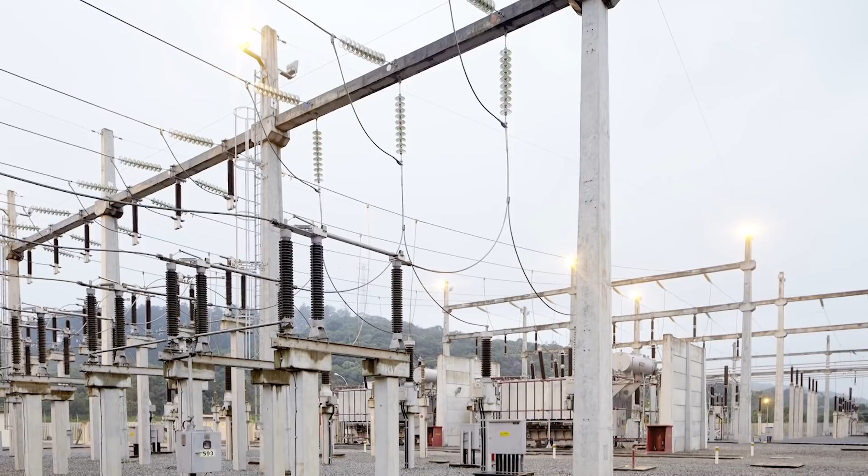A point to be mentioned is that Kandy is facilitated with infrastructure such as 93% electricity coverage as against 62% with pipe-borne water coverage.

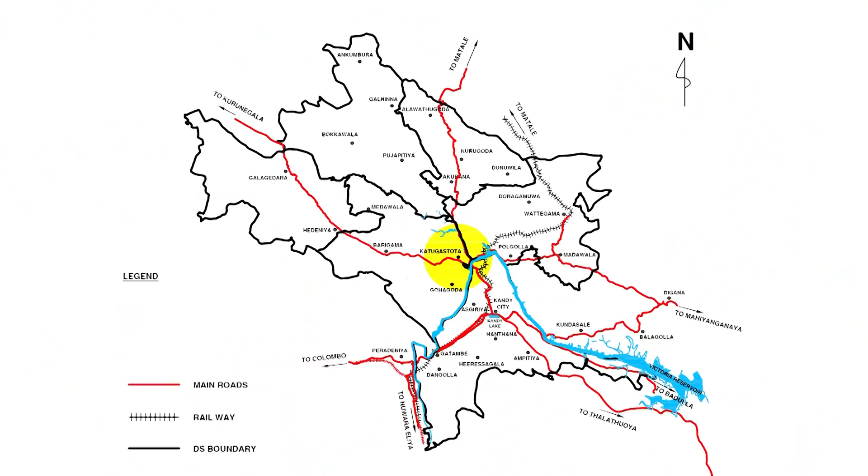Although the city of Kandy is surrounded by a wide range of mountains with the trace of the Mahaweli River, still pipe-borne water is a luxury to some parts of Kandy suburbs such as Pathadumbara, Akurana and Pujapitiya. Even valleys go dry during the dry season.

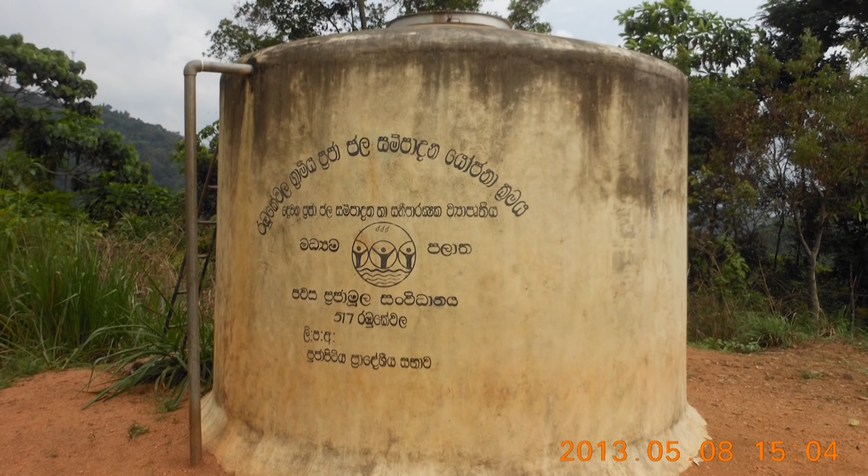The water service facilities before the year 2000 were limited mainly to the Kandy city, Harispattuwa and Pathadumbara areas, where borehole systems were constructed during the early 80s. The service level was very poor even in the Kandy municipal area. The small water systems, which were fed from deep groundwater sources, had quality problems as well as poor yield.

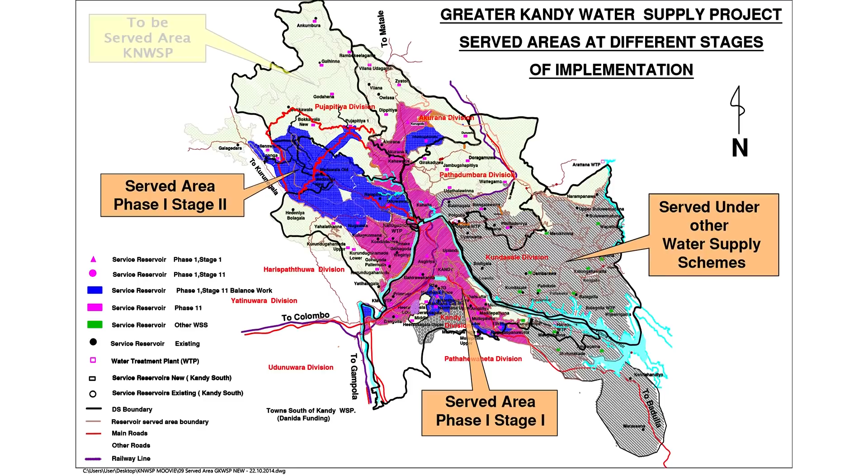JICA prepared a master plan with the National Water Supply and Drainage Board in 1998 to give a solution to the water problem in and around the Kandy area. This project was planned in 3 phases.

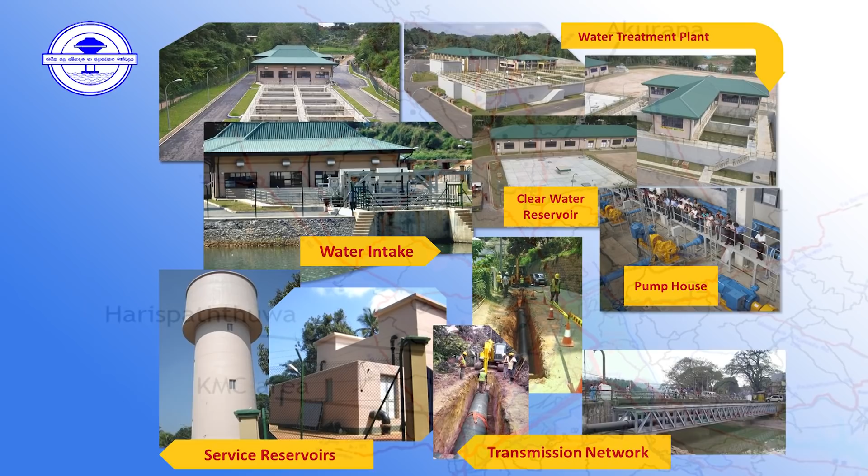Phase 1, Stage 1 of the Greater Kandy Water Supply Project started in 2001 and was completed in 2006, at a cost of 5,543 million rupees through funding of JICA.

Under Phase 1, Stage 1, a water intake was constructed from Polgolla pool at Gohagoda area. Also, a treatment plant was constructed in Katugastota with provisions for future expansions.

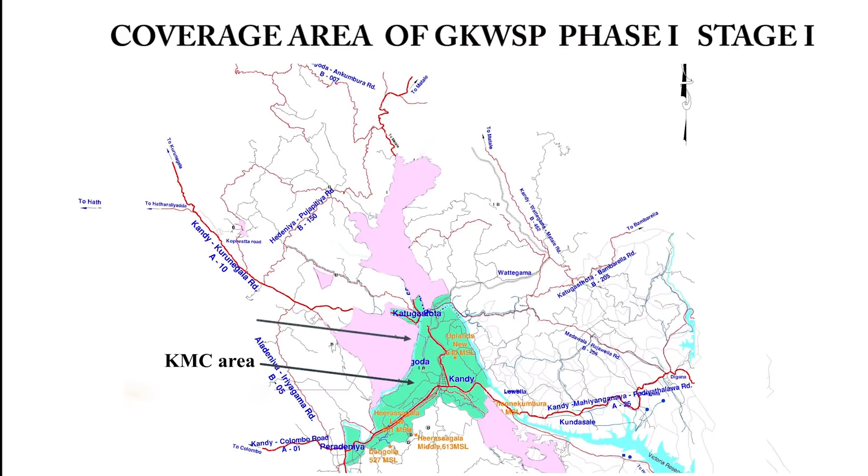With the implementation of the Greater Kandy Water Supply Project Phase 1 Stage 1, the water supply facility was improved in the Kandy municipal area, Harispattuwa, southern part of Pujapitiya, Akurana, and a part of Galagedara as well.

Under Phase 1 Stage 1, 4 reservoirs were constructed, including Asgiriya Reservoir, which was meant for the Kandy municipality. The existing service level in the Kandy Municipal Council area was also improved remarkably.

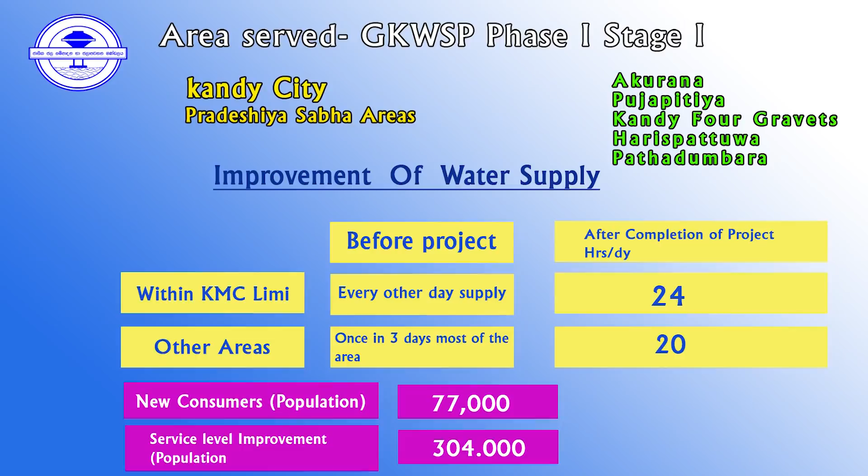Also, Kurugoda, Kahavatta and Kahalla service reservoirs and a pump station were built in Kahavatta to supply water to Kurugoda. New consumer population benefited by Stage 1 of the project was 77,000. Existing water supply facilities also improved for 304,000 of the population, including the Kandy Municipal Council area.

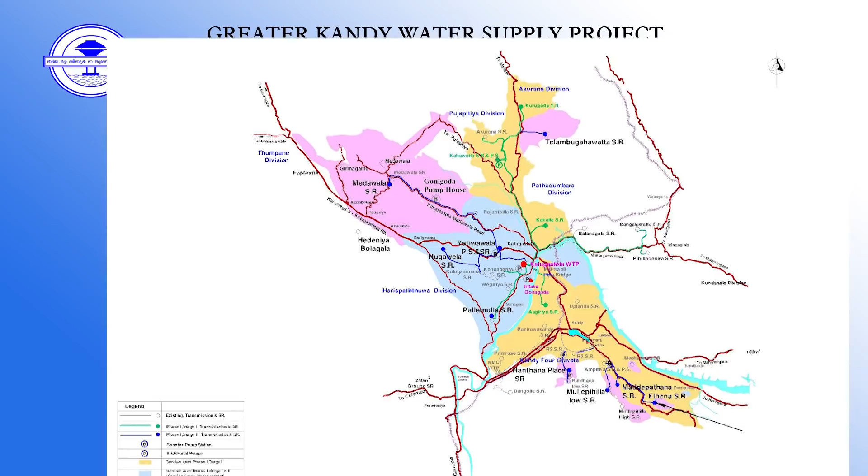JBIC, the Japan Bank for International Cooperation, agreed to provide further assistance to continue the water supply facility improvements in the Greater Kandy Water Supply Project area under Stage 2 of the project. Under the SLP 90 loan package, 3,447 million yen was allocated for the Greater Kandy Water Supply Project, Phase 1, Stage 2.

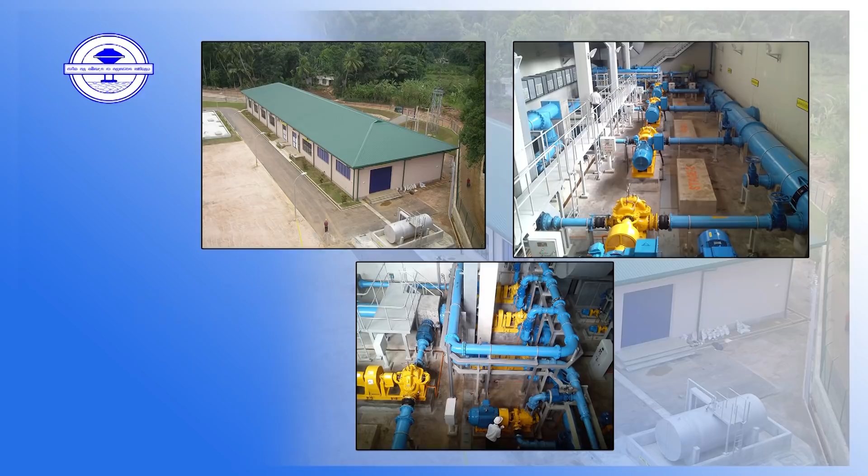The project scope consisted of 8 service reservoirs, namely Yathwawala, Nugawela, Guhaguda, Hantana Place, Mullepihilla, Elhena, Maddepathana and Telambugahawatta, plus 4 pump stations: R2, Hantana Place, Ampitiya, Yathwawala, and improvements to the main pump station at Katugastota water treatment plant.

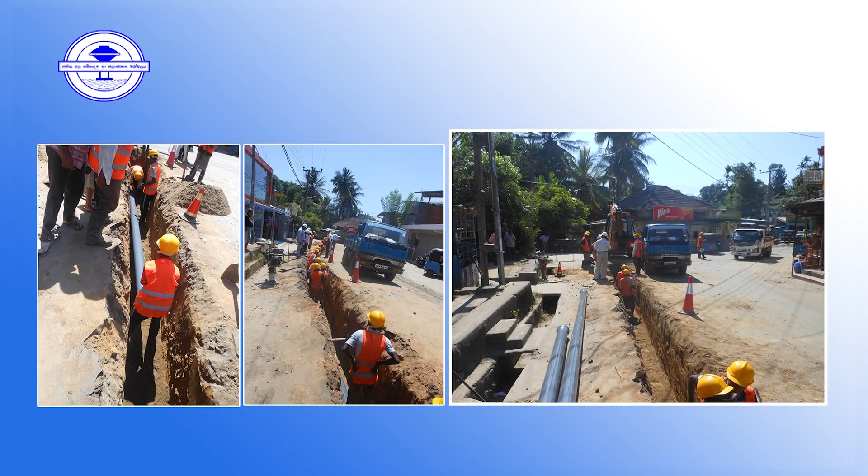In order to promote the local construction industry, all implementation work was done through Sri Lankan contractors.

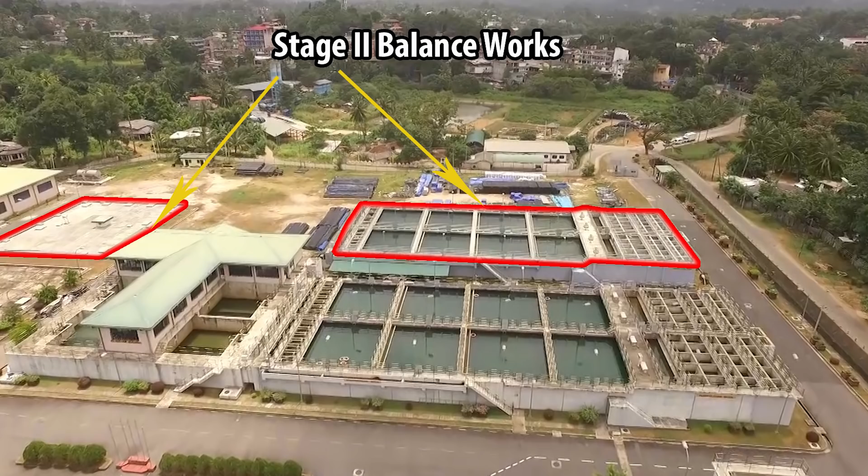Savings from the SLP 90 loan package of JBIC JICA were utilized to improve the water treatment plant, where a new flocculation unit, sedimentation tank and a ground reservoir unit were built, to enhance the water treatment plant capacity up to 48,000 cubic meters per day.

The Greater Kandy Water Supply Project was able to supply water to Medawala Reservoir in order to improve the service levels of consumers living in Rajapihilla, Medawala, Hedeniya, and Pujapitiya areas.

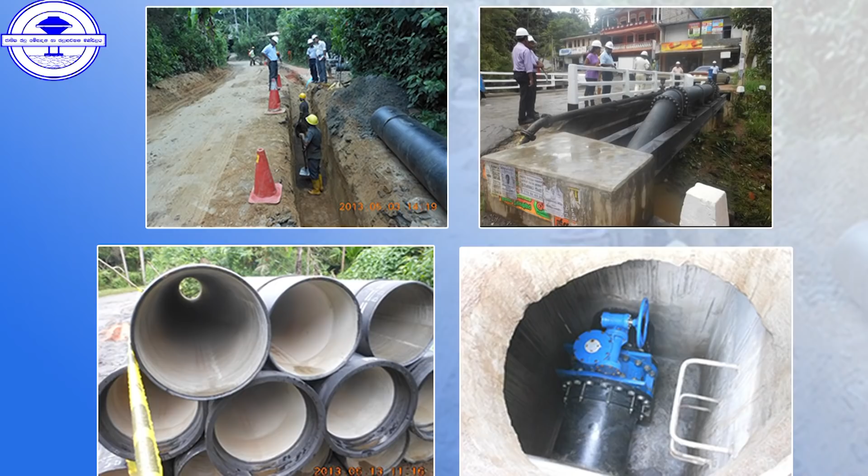A 4.5 kilometer long transmission main was laid and the Gonigoda pump station was constructed to feed the Medawala new reservoir and the Medawala existing reservoir as well.

Provisions were made to supply 5,000 cubic meters per day to the Galagedara and Mavatagama area.

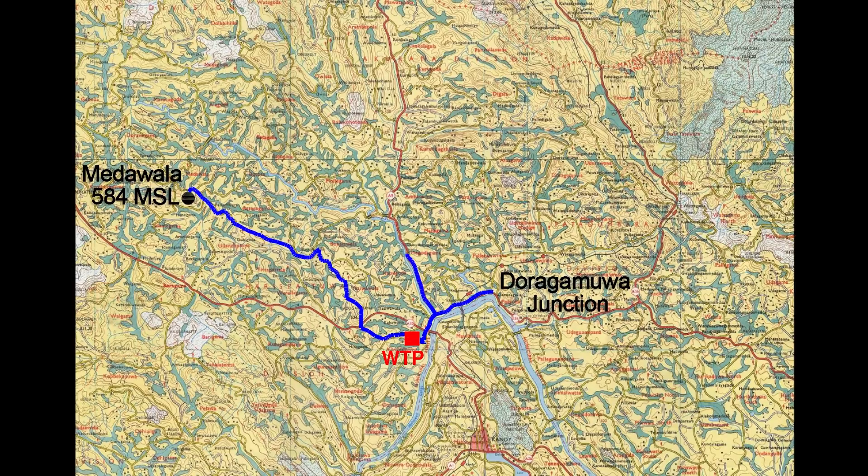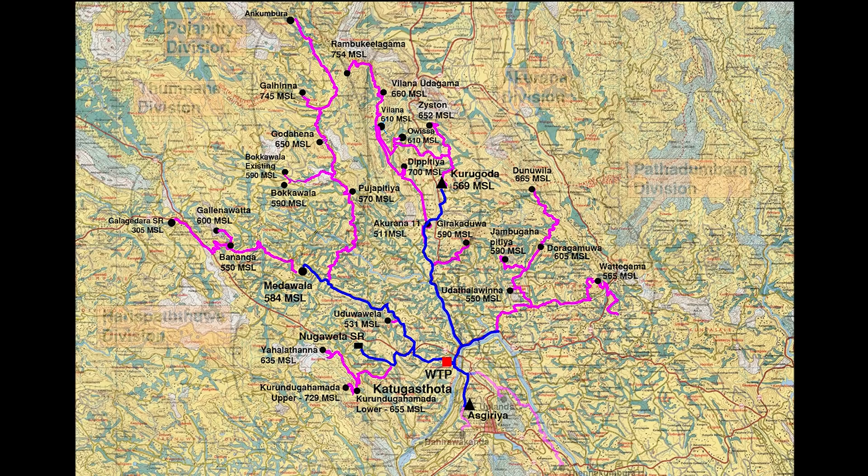The Greater Kandy Water Supply Project carried out a master plan review in order to develop project proposals to expand the water supply facilities to Pujapitiya, Akurana, Ankumbura, Bokkawala, Alavatugoda, Dunuwila, Pathadumbara and part of Galagedara, and higher elevation areas of Harispattuwa Divisional Secretariat Division such as Yahalathanna and Bogaskumbura.

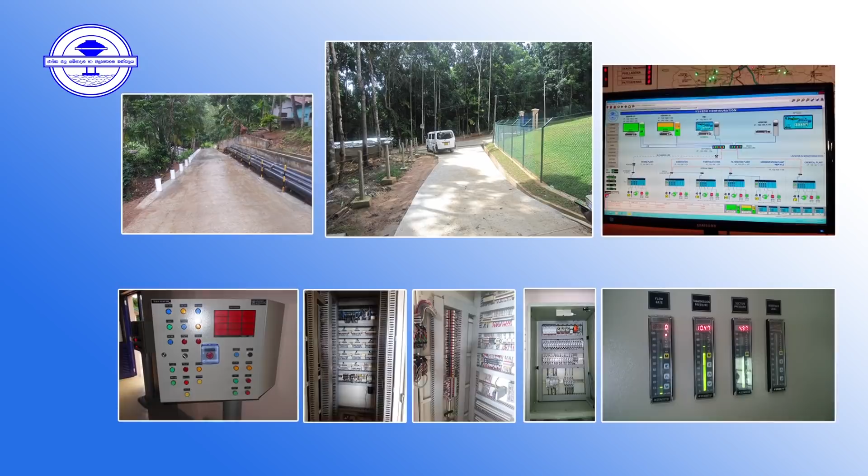Special features were incorporated into the project implementation, considering long-term sustainability of facilities. Quality goods were procured and safety provisions, a flow monitoring system and a SCADA system were introduced.

Social and environmental aspects were considered during the implementation period, and the infrastructure facilities of the surrounding area were also developed, including road improvements with retaining walls, mirrors, signboards, and concrete roads with drains.

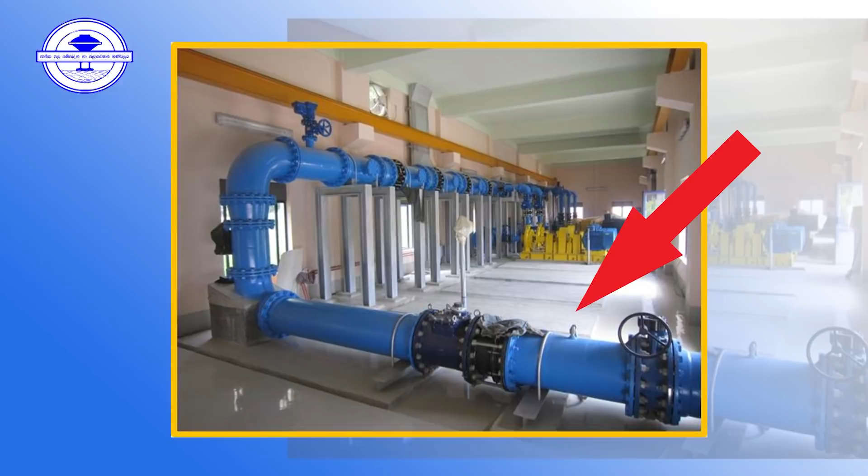Quality of construction and the reliability of the outcome were the main concerns. Space for future provisions was allocated as far as possible to avoid difficulties during facility expansions.

11 quarters were constructed near the water treatment plant to provide accommodation facilities for operations and maintenance staff of the Greater Kandy Water Supply Scheme.

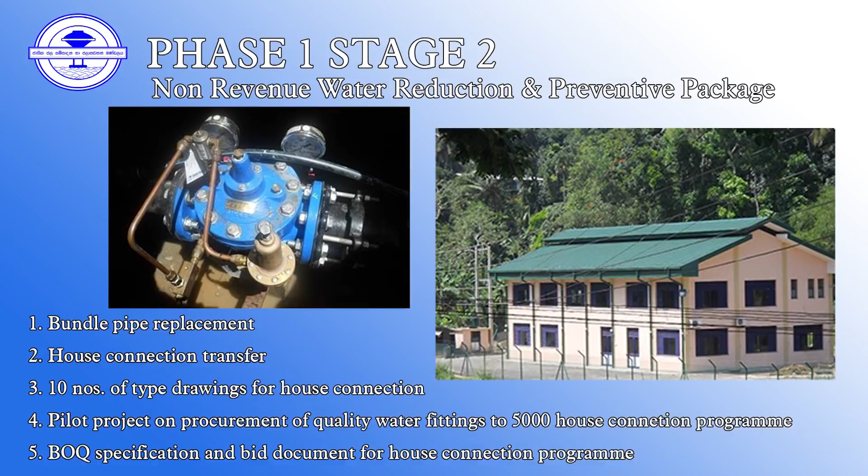One of the key activities done by the Greater Kandy Water Supply Project was non-revenue water reduction and prevention program, including bundle pipe replacement, house connection transfer, installation of bulk meters for night flow studies, design and preparation of type drawings for house connections, a pilot project for procurement of quality water fittings for 5,000 house connections, and introducing new BOQ, specification and bid documents for house connections as an institutional support measure.

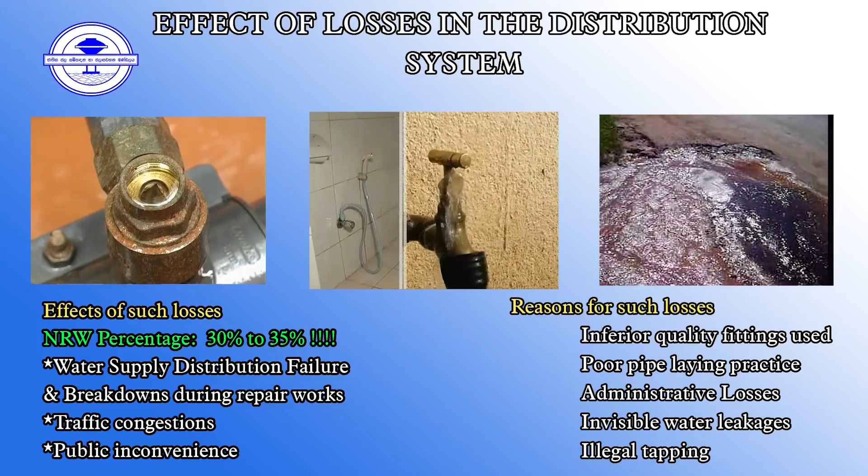Currently, 30 to 35% of treated water is wasted due to leaks in transmission and distribution pipelines, as well as internal losses of housing units at customer premises.

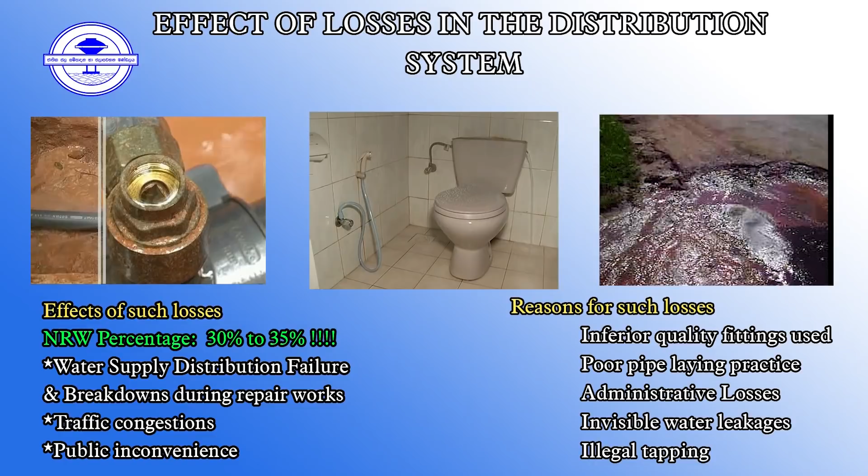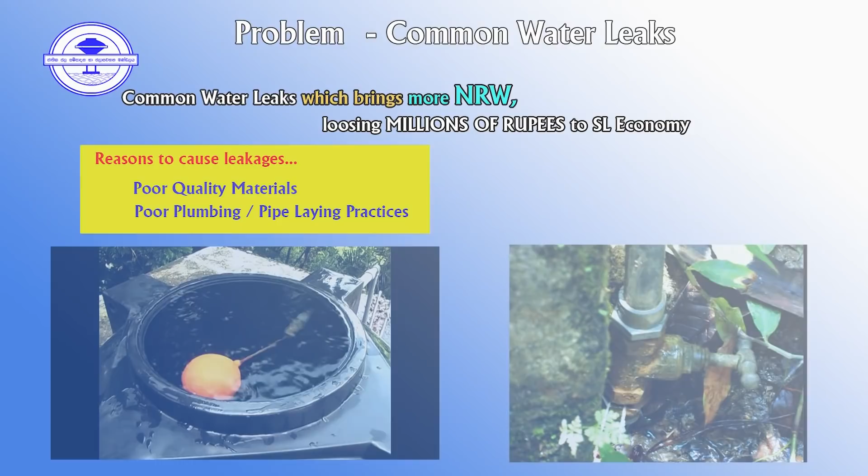Consultative workshops were held to identify the cause of water losses in distribution systems and consumer units, and it was identified that the main causes of leakages are the use of poor quality water fittings and poor plumbing practices. To address these causes, appropriate strategies were identified and proposed to water sector managers.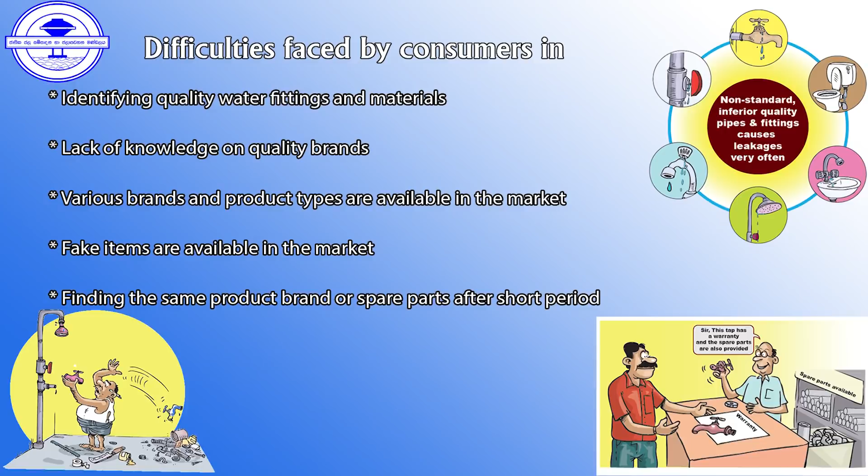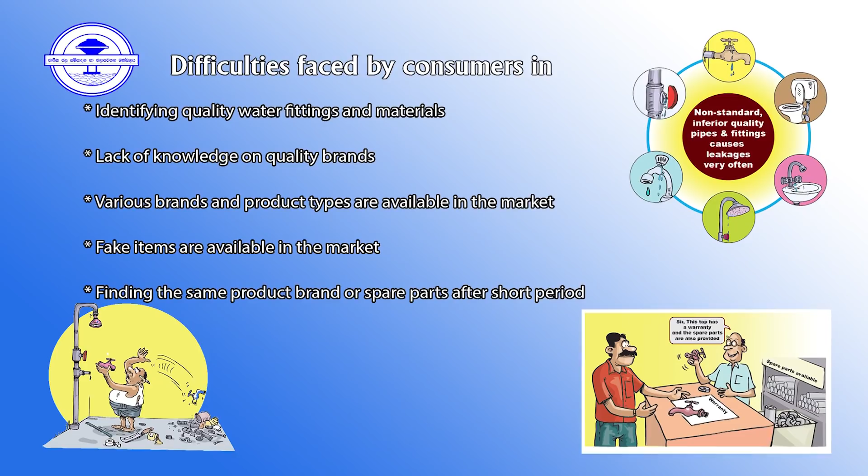Consumers tend to buy water fittings that are available in the market. Most items available do not have quality standards or guarantees, and spare parts are often not available. It is difficult to identify fake items as reputed brands are prominent in the market.

The most vulnerable water fittings and plumbing systems are the float-operated valves, flush valves in the system, and swan neck taps in the pantry. These items are regularly used by consumers, and most leakages occur from the above items in domestic plumbing systems.

A project study reveals that availability of quality products with long-term reliability is the only solution to minimize water losses. With the initiative of the Greater Kandy Water Supply Project, the National Water Supply and Drainage Board has got approval to regulate imports of water fittings.

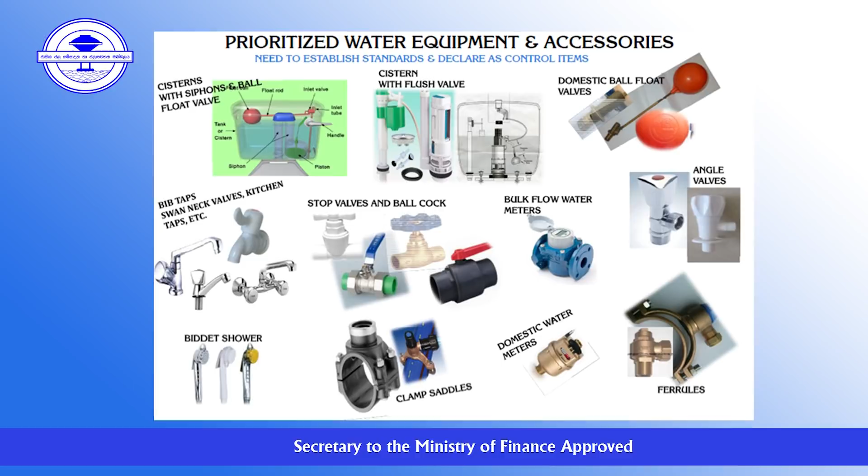Appropriate standards were proposed to the Sri Lanka Standards Institution. As a pilot project, regulatory measures were introduced for float-operated valves, effective from 1st January 2017.

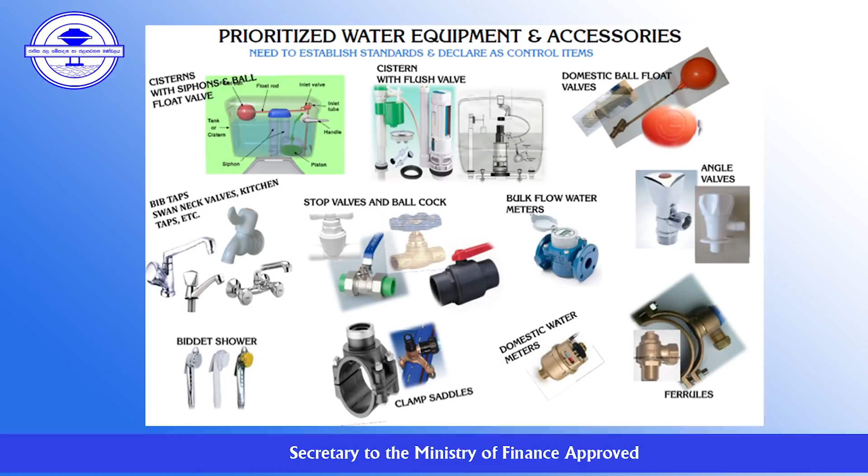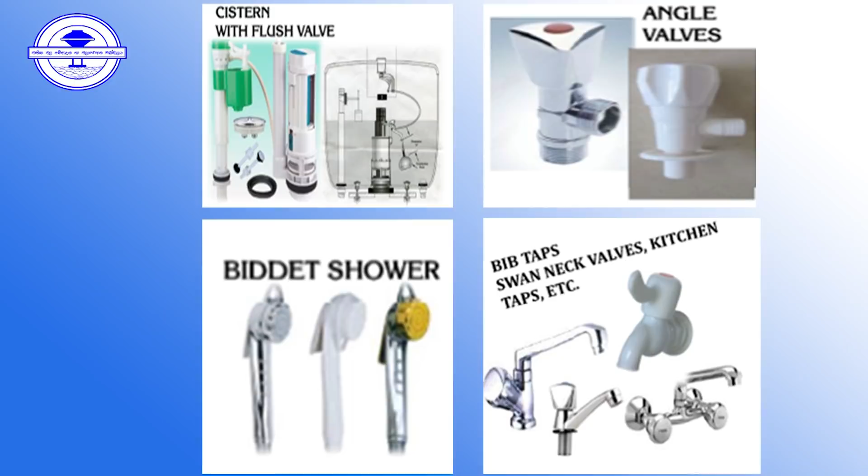The Ministry of City Planning and Water Supply and the National Water Supply and Drainage Board has already taken steps to introduce regulatory measures on imports of materials for 4 more items, namely flush valves in cisterns, swan neck taps in pantry, angle valves and bidet showers.

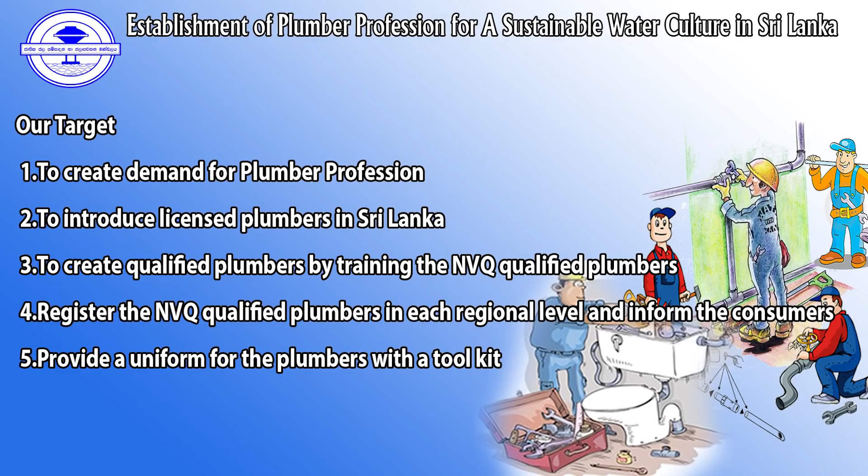The other main cause of leakage is poor plumbing practice in domestic internal plumbing systems. Most practicing plumbers in the country are not trained properly and do not have proper qualifications.

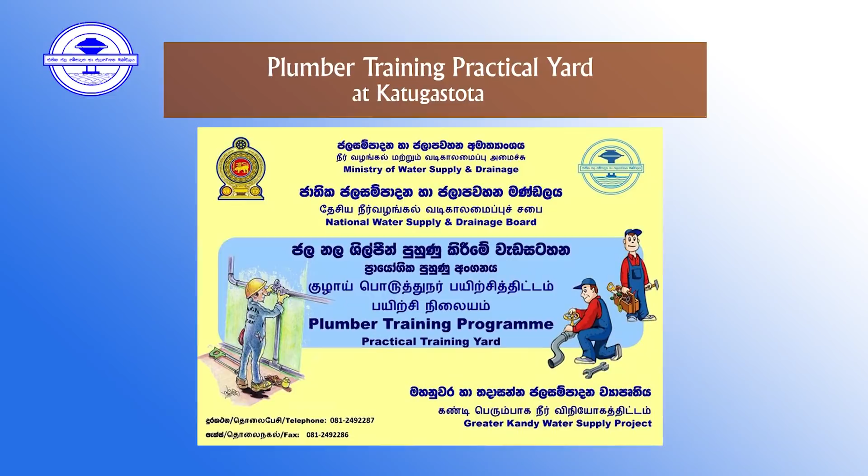Special training programs were introduced to train plumbers island-wide. Already, 350 plumbers were trained and introduced to customers. Plumber training yards were constructed in 5 provincial offices of the National Water Supply and Drainage Board, and the main plumbing demonstration yard was established at the Knowledge Sharing Centre in Katugastota.

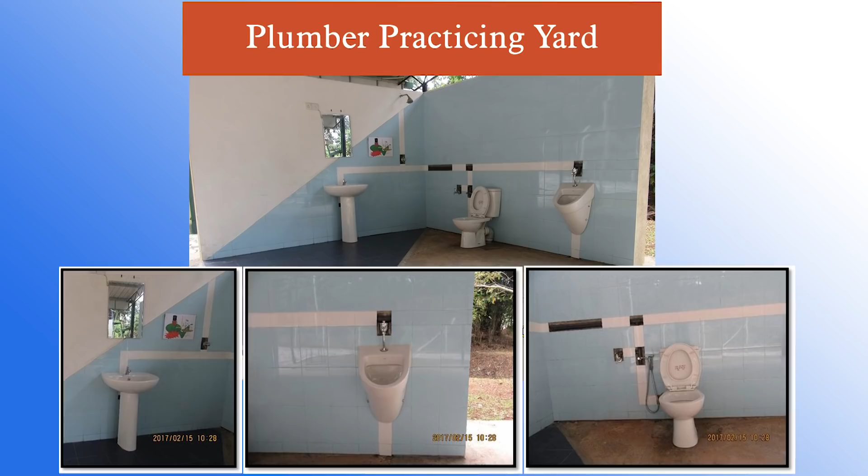A licensed plumber system is required to promote quality of goods and services in the water supply sector. To ensure water conservation through minimizing leakage, it is essential to introduce quality fittings to the Sri Lankan market and promote proper plumbing practice. Quality of fittings are to be regulated and frequent quality monitoring systems introduced.

A water fitting testing laboratory was constructed and commissioned to provide testing facilities for domestic water meters up to 40 millimeters, stopcock valves up to 300 millimeters, and bulk flow meters. These facilities help to procure quality goods for our country.

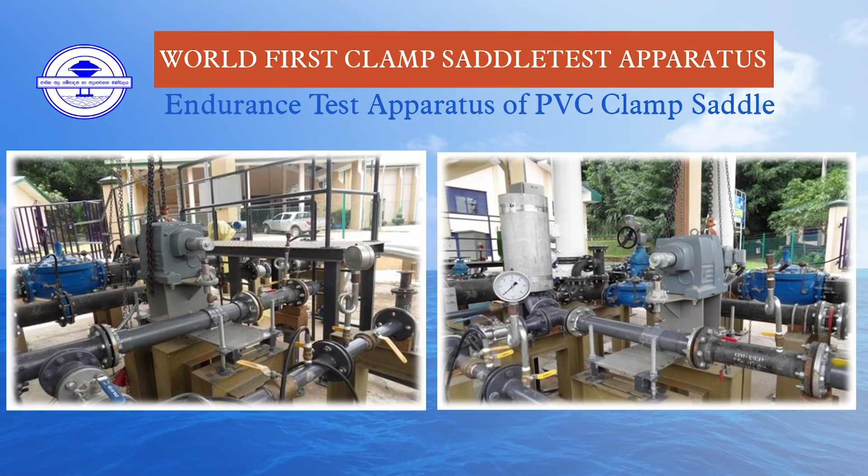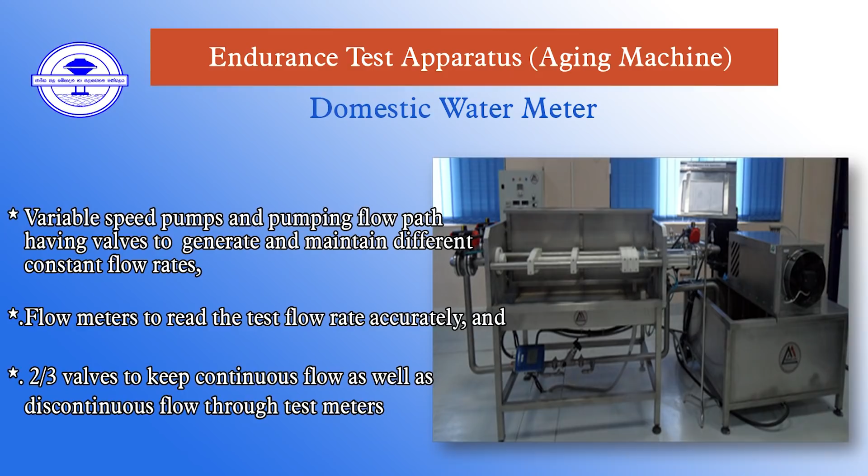A clamp saddle testing apparatus was established as the world's first clamp saddle endurance test apparatus. This endurance test apparatus is very useful to identify the long-term reliability of water meters, stopcocks and clamp saddles, helping to identify the quality of pipe fittings and water meters.

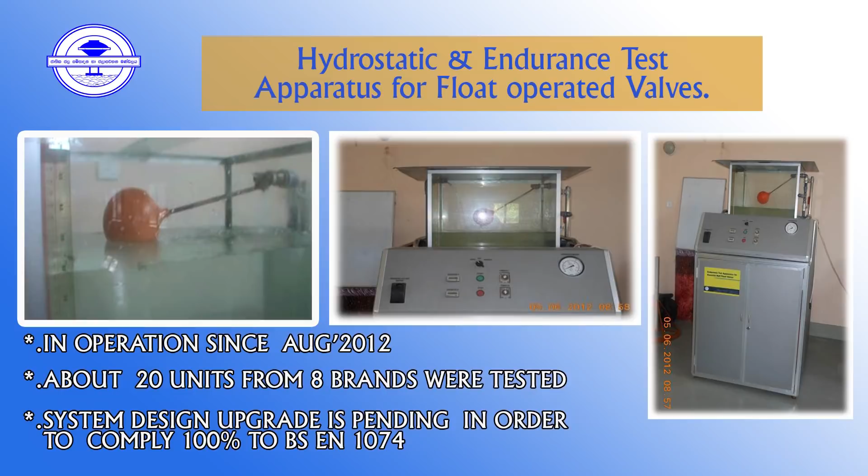Several awareness campaigns were carried out to promote non-revenue water reduction and prevention strategies. A documentary drama emphasizing the quality of goods and services was produced and telecast on national television networks. Exhibitions were arranged for school children and the general public to raise awareness on the cost of water, value of water, and need for water conservation.

Street drama was one of the popular tools to promote the need for water conservation. A consumer manual was published for the benefit of water consumers, containing water conservation measures to reduce the water bill.

The book, Caring for Water, authored by Dr. Sarath Amarasiri, was printed in 3 languages and distributed among school children, public sector institutions and libraries. Calendars were distributed to more than 9,000 schools in Sri Lanka in 3 languages.

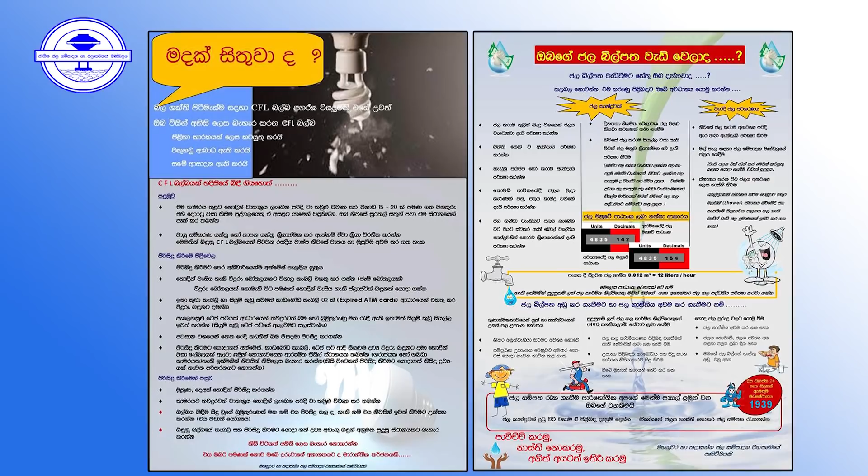The Greater Kandy Water Supply Project not only provides water to the people but also provides great contribution to long-term sustainability of the water sector by establishing a water fitting testing laboratory, extensive awareness campaigns on water conservation, enforcing regulatory measures on imports of water fittings, and establishment of quality plumbing practice in Sri Lanka.

Let's utilize, let's stop water wastage, and let's save for the others and for the future.